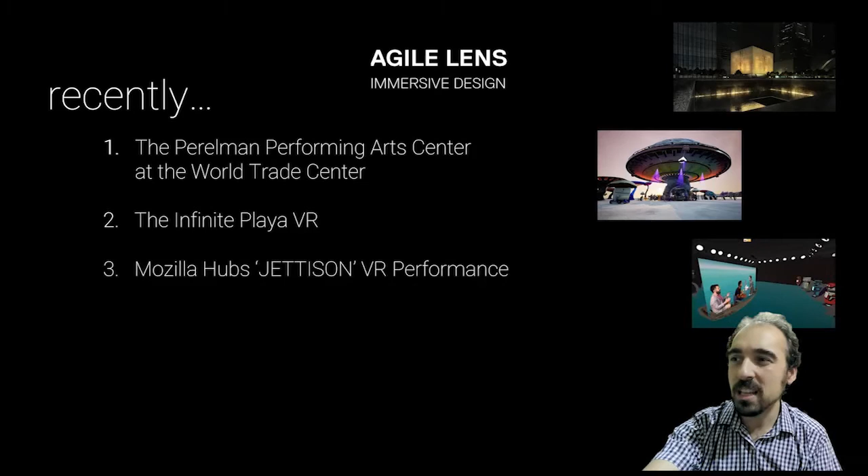We also worked in Mozilla Hubs recently - this was a couple weeks ago. We did a live performance of a little theater piece called Jettison, where we had the actors both composited together inside a browser, and then also had them perform as their avatars at the halfway mark in the show. So a little virtual theater, and it all ran in a browser, 2D or VR - it all worked together, super accessible.

Also a big fan of teaching and education, and giving talks like this one. Since spring semester of 2020 - seems like a billion years ago - I was teaching Unity at the Syracuse School of Architecture. And this semester, I'm at the NYU Tisch School for the Arts teaching drama and game design students how to give good live performance in VR, along with some other Agile Lens collaborators. That's been really excellent.

I also recently became an Unreal Engine authorized instructor, which is very exciting, and I like to bring it up whenever I can because it feels great. I can't really talk about this right now, but I want you to keep an eye on my socials - check out ibrews on Twitter, because there will be more information soon. I'm working on what I believe is the world's first virtual volumetric keynote speech, involving a virtual theater and some very cool volumetric capture technology. So keep an eye out for that.

And then lastly, I bring up David Geffen Hall at Lincoln Center, because even though I've gotten to work on quite a few virtual theaters over the years, this is the one that I hope will become a sequel to the talk I'm about to give about the Brockman Hall for Opera, because we've taken a lot of the lessons from Brockman and brought those and enhanced those and yes-anded those, to use an improv term, for David Geffen Hall.

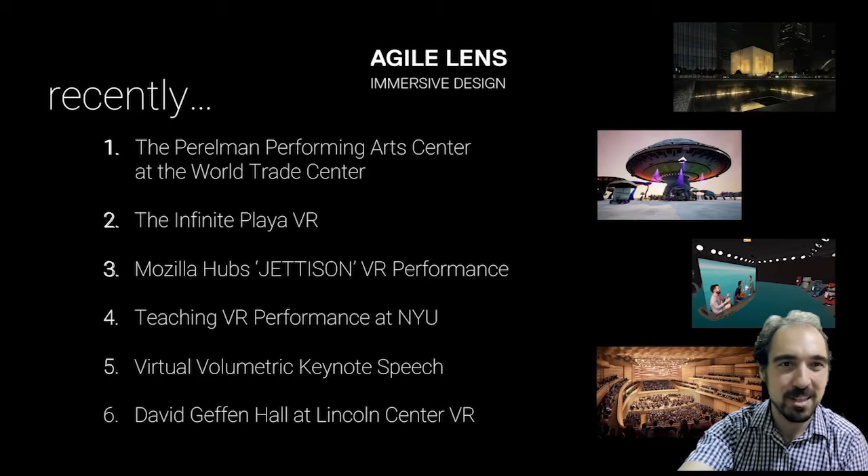And so where did Agile Lens come from, and how did we get to this point where we could actually use virtual reality across the entire design of a theater?

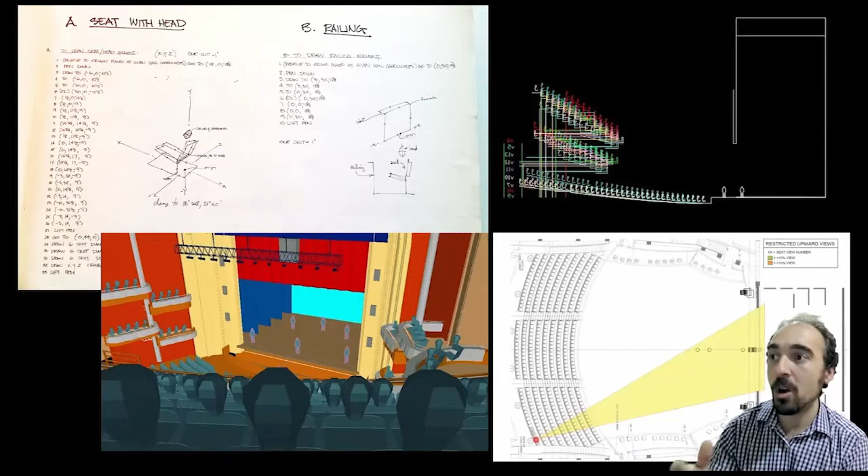Well, Agile Lens grew out of Fisher Dachs Associates, which designs theaters all over the world. They're a theater consultant. I was working there in 2012 and 2013 when the Oculus Rift came out, and that was really an expansion of the work Fisher Dachs had already been doing since the 80s for testing sightlines. So when I got there, we started to do these simple renders to just say, here's 5 different seating options. Which one do you like best?

We found that with these fairly straightforward 2D images, where it's like the same seat shown 4 different ways, we'd get into a discussion with the client where they'd say, I don't know, that head there looks really close. And you'd say, no, it's 2 feet away, that's pretty standard. Or they'd say, oh, the stage looks so far away. And you'd say, it's 45 feet, not that far, trust me, it's like a normal theater. It's just very hard to convey that information in 2D.

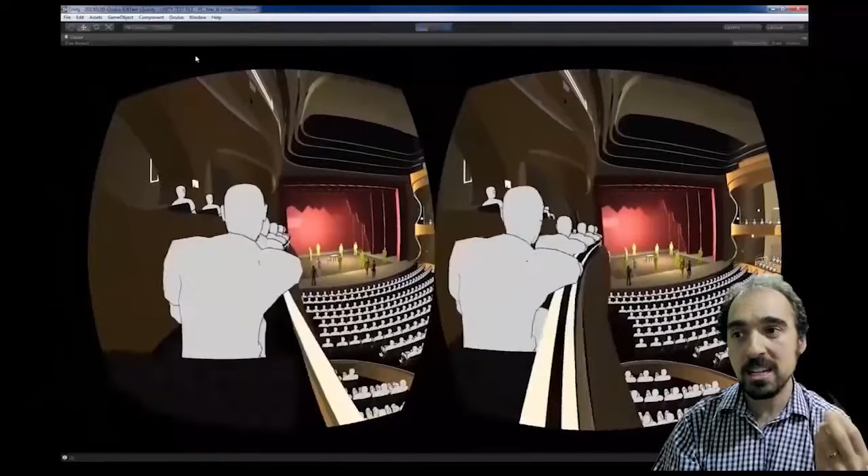So in 2013, we got the Oculus Rift DK1, quickly followed by the DK2, and the ability to do those same kinds of seating options, but now where someone actually has a sense of space and presence, and what it's like to lean just a few inches and how that affects your view. That was an incredibly powerful tool. It was a game changer.

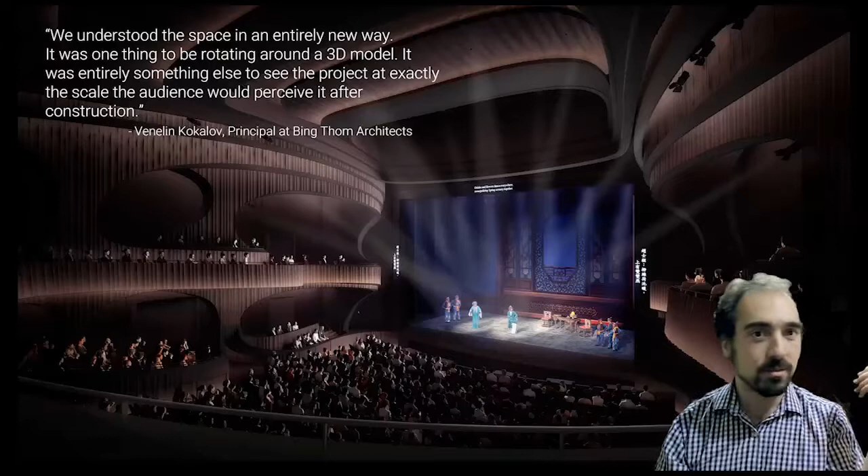Immediately we started to find other uses for this, not just sightlines, but cycling through different design options. The very first project we finished this for was the Xiqu Centre for Chinese Opera in West Kowloon, China. It was great - a very curvy space, a lot of Rhino modeling trying to make its way into Revit, and being able to very quickly compare option A, B, C, D for especially those railings and curves was wonderful.

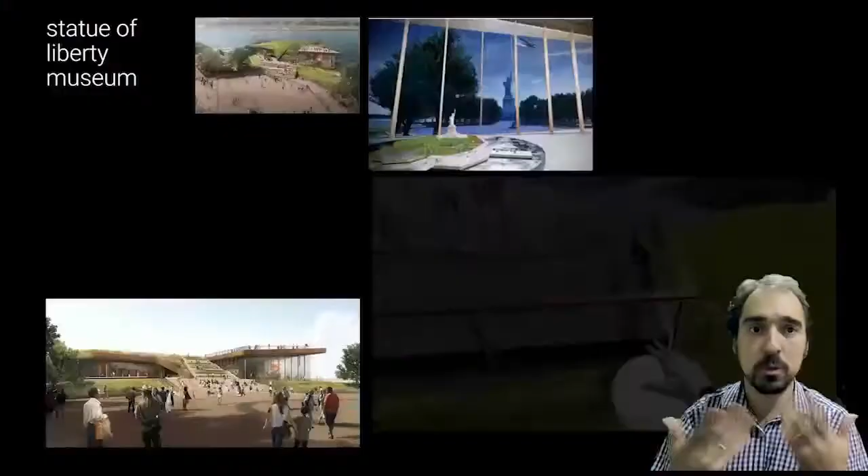And then we decided to form Agile Lens as a separate company to be able to focus on building these kinds of experiences. Over the next few years, we got to work on a wide number of experiences where virtual reality had some tools, for the Statue of Liberty Museum on Liberty Island with FX Collaborative.

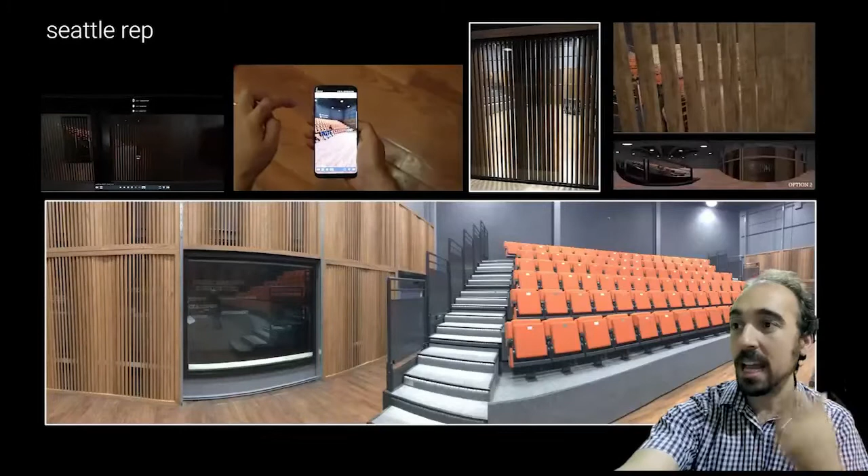That was primarily a design review tool, which I feel is one of the more common uses for VR. Seattle Rep was a great quick little Unreal Engine study where I feel like we really captured the essence of what the final space would feel like, and we were able to look at different options for that wooden screen on the wall, making it very accessible to run on a phone.

Then we had other projects with various lessons - too much photorealism too quickly, being able to grab a section box around a piece of a Revit model and getting really useful information really fast for an internal design team. But what we really wanted was a project where VR could be part of the design process through the entire project lifecycle. That finally came in 2015 with the Rice University Music and Performing Arts Center, known then as RUMPAC, now known as the Brockman Hall for Opera. So we're going to go through some lessons learned over the course of this process.

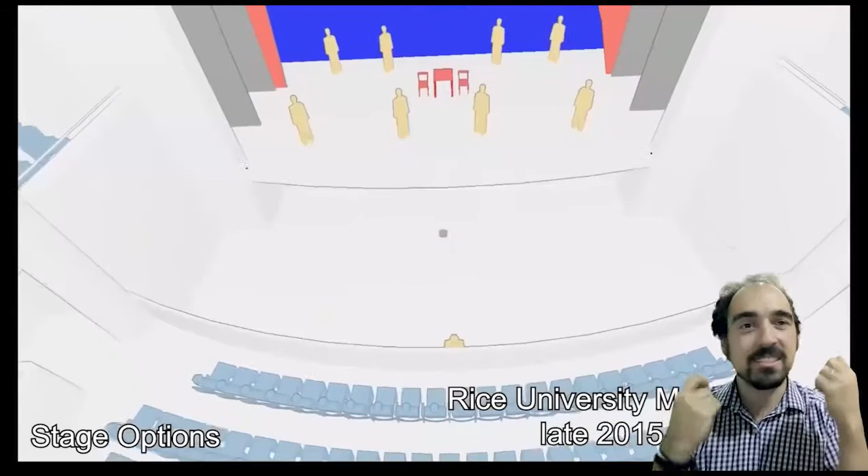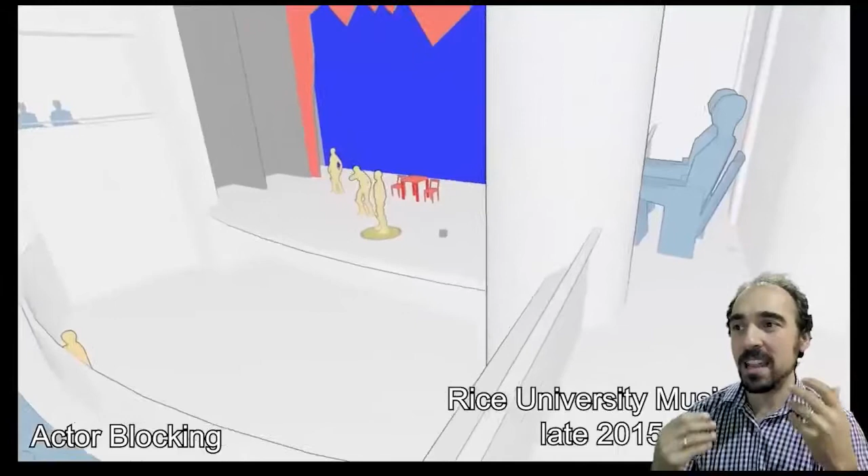Lesson 1, as I briefly alluded to, is that to feel immersed in a project, it doesn't need to be photorealistic. Right from the beginning, when we were just playing in SketchUp for the different designs for this hall, no textures, no lighting, nothing that was going to distract from purely the spatial experience. We were testing sightlines here, putting different things on stage, but really it was just about how it feels to be in this version of the design with this on stage, or the seats in this configuration versus others.

So you'll see there's a blue scheme and a green scheme. It was an incredibly useful study at this stage to just talk about that expansion and contraction of the different versions and test it out from different spots in the hall.

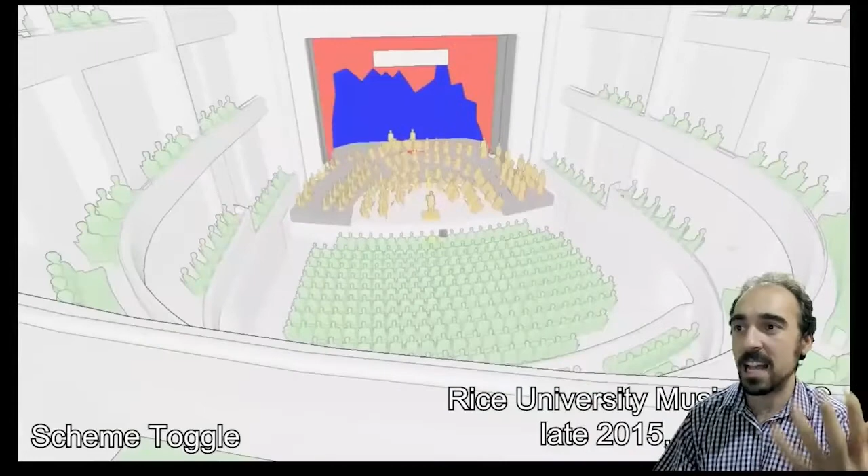And from there, as the project made its way into Revit, we started to develop it further. We got a hold of some Vive trackers. I had some fun early experiments with those, doing things like battling a ceiling fan, but then bringing it into the practical world, we found that it was really useful when we could start to not rely on VR controllers so much and actually deal with real world objects.

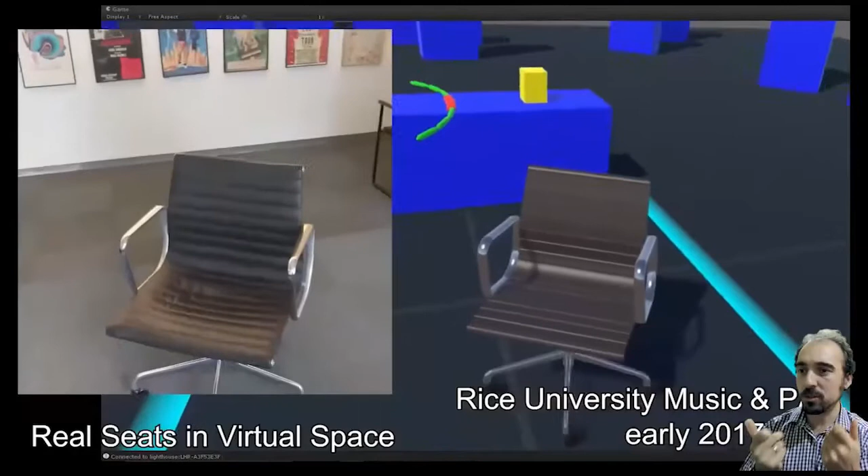So here, we just took an Eames chair that was in our office, got a 3D model of it, and then tracked it in such a way so that while we were in the theater, we could actually adjust the locations of different seats, and then that would actually make its way back into Revit, into the actual design, so we could really fine-tune exactly where different locations would be. We could discover new seating locations. We could check out the distance from a seat to a rail, and again, talk about what that experience felt like.

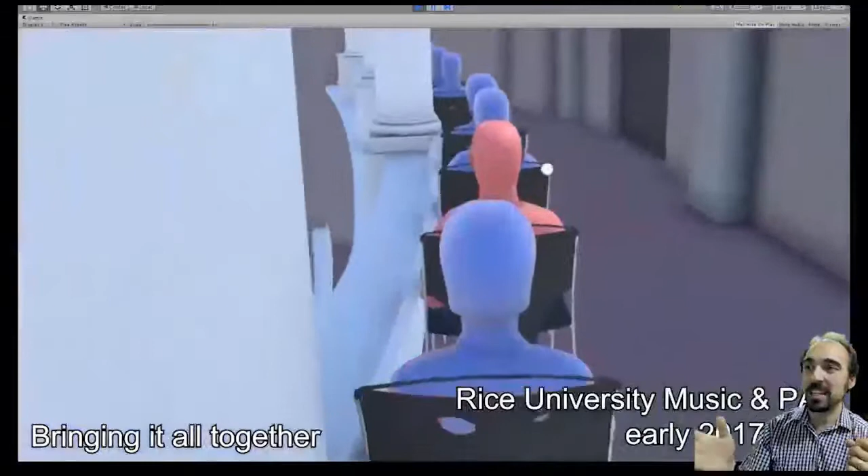And lesson 3 became that it is useful to cycle design options for everything in the project, everything you can imagine. So we found that we were cycling everything from places to put the aisles, to places to put the railings, to the columns, to how the seating could be configured, to where we might want to place lighting locations, to what would be on stage. And we could cycle through all of these options in the same VR experience.

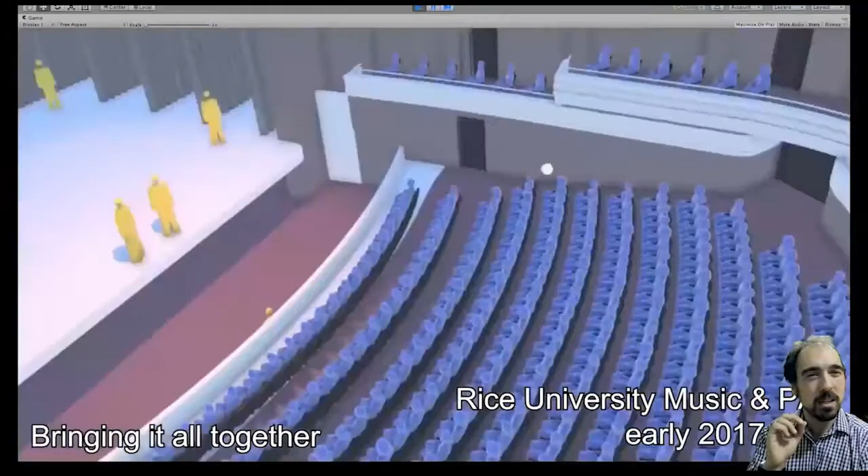And not only that, we could also cycle through the different versions of the project. You see the green there, that's the old SketchUp model, so that if at any point we're wondering, like, man, I feel like we lost some essence of the design, you click a button and now you're back in where the project design was at a more conceptual level. And that became really useful to make sure that there was some spirit that carried through the entire design process.

Lesson 4 became, it is so important to actively make design decisions from within VR, and not so much in a design review capacity where you're just looking at the model and then changing to some different options, but actually like grabbing a ceiling and moving it up and down and saying, down, down, down, stop, that's good, leave it there. That has a lot of power to it.

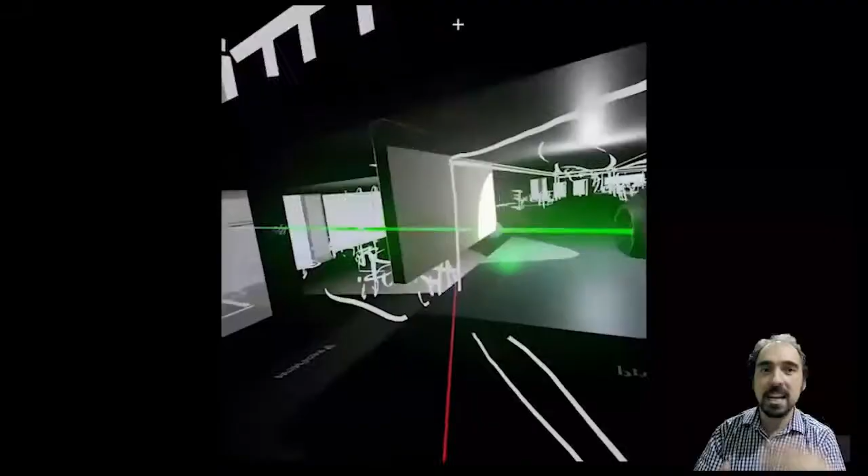But it can also be great for something as simple as a sketch. You know, we've all seen napkin sketches, and this idea that you have this parti, this essence of a project distilled into a sketch. But if you do that in a virtual reality capacity, then you can actually add some scale and dimension and human experience to a sketch. You're not prescribing wall thickness or where light is coming from, but you can have a sense of compression and release, for example, as you move through a project. And that can become kind of almost like trace paper, like an underlay, as you start to lay out other design decisions. And you can start to play with lighting, massing, simple concepts that build upon each other from within VR.

So this is just the standard Unreal Engine VR editor. Nothing too special here, but it's an incredibly powerful workflow as designers.

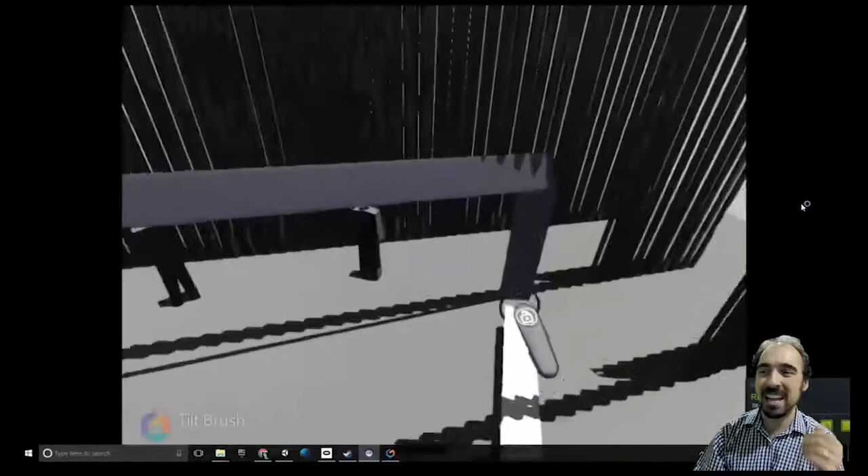We also started to play with set designers. This was actually a little thing we did at a conference where we let set designers actually take the stage for Brockman Hall and play with just sketching on top of it. And then they could drop their designs into the actual theater at its current state and jump around to different seats and see, you know, how does that feel?

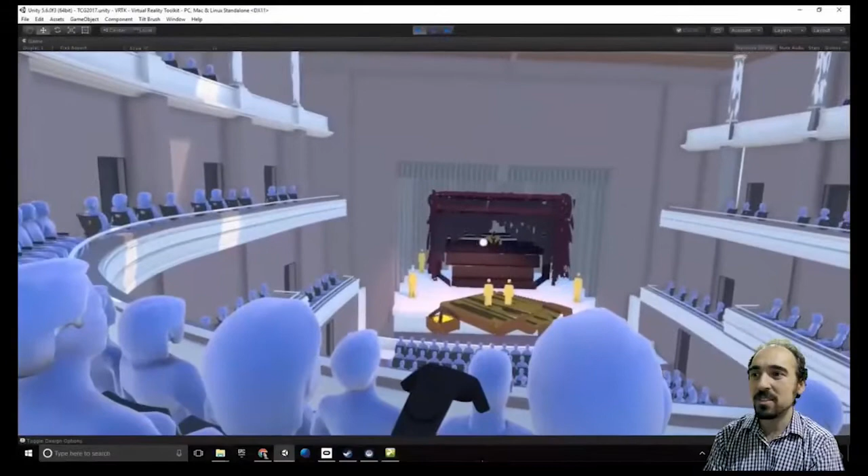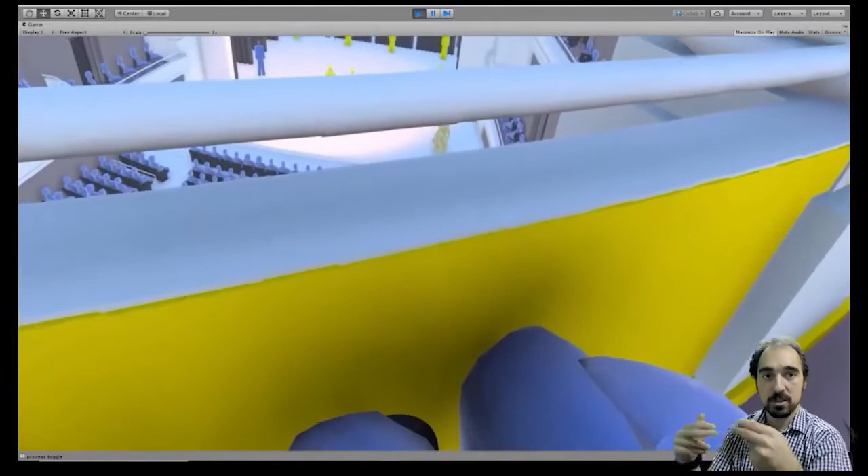And then for the railings, we really went above and beyond by making it so that there was an algorithm that started to dictate how the railing was designed. And we actually allowed the architect, Allan Greenberg Architects, to sit down and just grab parts of the railing, these 3 parts to it. And then within certain code constraints, they could kind of push and pull it and say, you know, what feels most ergonomically correct. And then they could say, okay, that feels good. And then that, again, could make its way back into the actual design. Very powerful.

Lesson 5 is that photorealism does have its place. As the design gets further along, it is incredibly useful to say, like, okay, but really, what's the project going to look like? And so for us, you know, we were in Unity for the first couple phases of this project, and that was great.

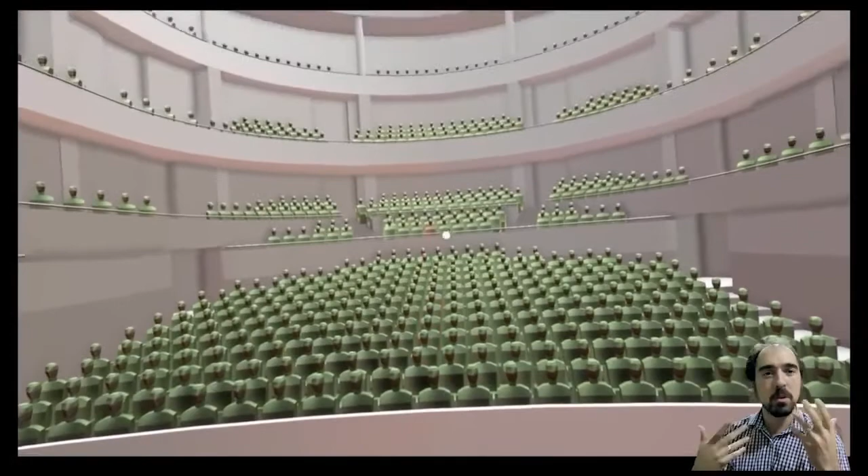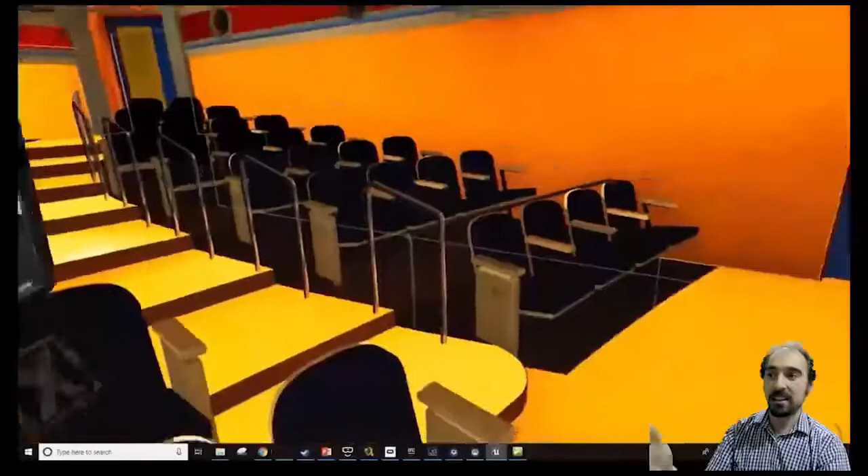When we started to get to a point where we're playing with more color and light, we needed something that felt a little more photorealistic. So at that point, we actually brought the project over into Unreal Engine. Here we are again in the VR editor, nothing special here, and all we're doing is playing with color. When you get that level of photorealism that Unreal kind of has out of the box, you really start

to feel how color and light change the sensation of being in a space. Not to mention it's incredibly easy to scale up or scale down. With a click of a button from the VR editor, you can go back to human scale, but you can also get into this kind of dollhouse mode, similar to Tilt Brush if you've played in there.

It's just an incredibly powerful way to look and evaluate the current state of a design. So here we set a few presets of colors and could have someone put on the headset and just really quickly cycle through them. This isn't something that's scripted and coded - this just became the undo and the redo button.

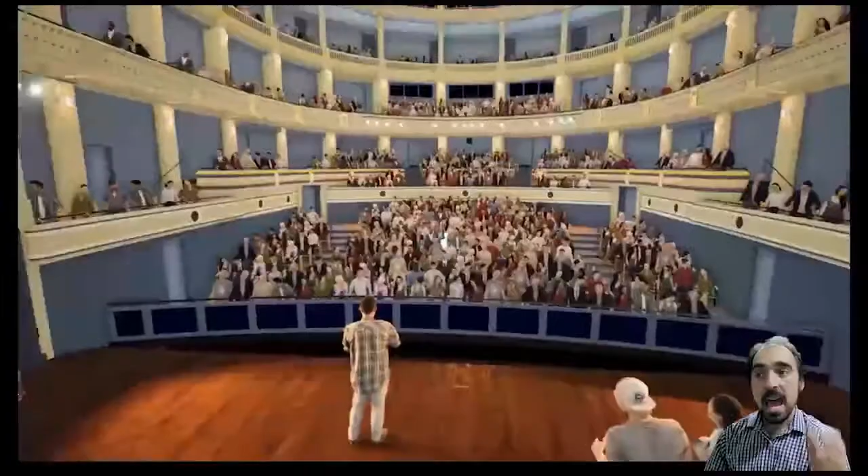And then, of course, we populated it with people and had a lot of the same functionality that we had in the Unity experience, such as the ability to jump to any seat and see what that view is like. Having the room actually full of animated people had an incredible immersion multiplier to really make you feel like you are in what is going to be the final space.

Taking that further, just like we played with sketching set designs via Tilt Brush, we also started to put real designs in there and some volumetric captures of simple performers, just to have a sense of activity and what it's like in the space.

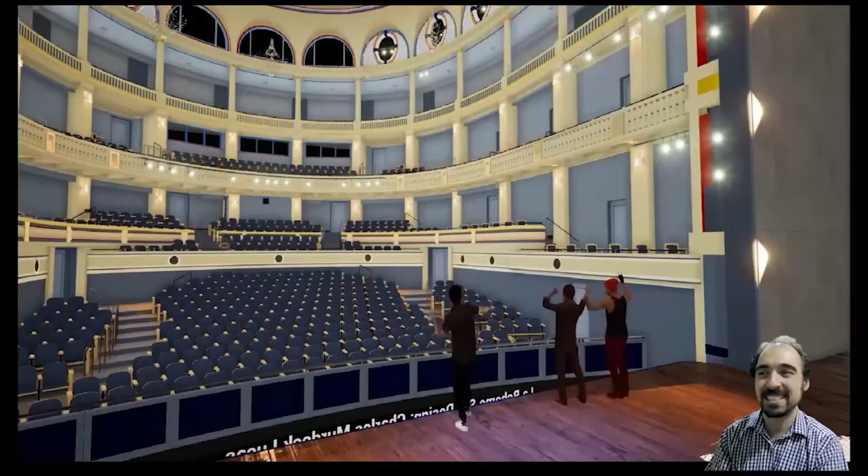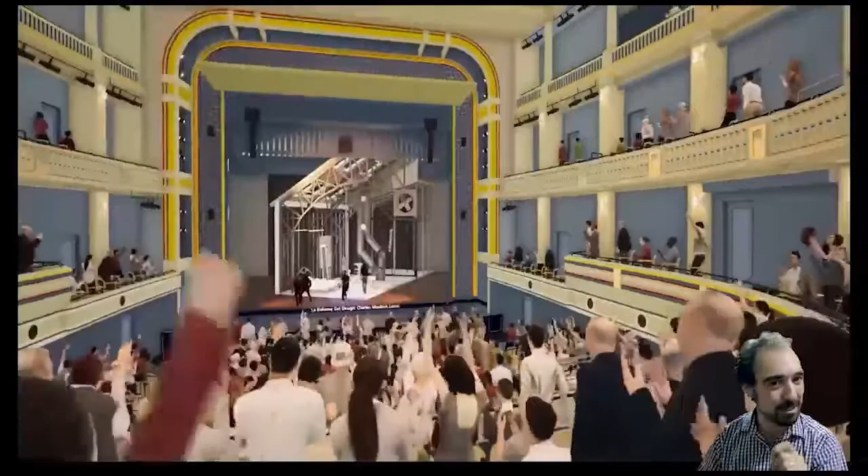We also played with changing the capacity. I'll tell you, it's very sad to be standing on the stage and pretending to perform and only having 25% capacity. On the other hand, it feels very cool to be there on the stage and have a virtual standing ovation. I've had a few guest stars come to the office in New York City, and they always get a kick out of being on the stage, and I press a little button that makes everyone cheer and clap for them.

I'll do that for you too. If anyone wants to come to my office in New York City, you will get a standing ovation.

Lesson 6 is once you have a really robust VR model, especially at that photoreal level, it's a great place to actually generate 2D media. A lot of times we get asked, do you really need to make a VR model? Can you just make us some renders or some animations? And the answer, of course, is yes.

But there's a million reasons why we'd always prefer to actually go as far as VR, because you're actually going to understand what it will be like for humans to occupy the space at some point in a way that no other medium quite conveys. But then also once you're there, you can start to generate images and animations and all those things very quickly, because it is a real-time model running at 90 frames per second.

So a pretty good-looking animation can be output in real time, versus if you were doing all that from scratch, you'd be figuring out what to texture and what to light, and there'd be much more of a process to work through all that, versus in VR, again, pretty much real time.

As an example of this, for the Yale Schwarzman Center, this was actually a fun little study that Unreal Engine did from our office - so thank you, Sean Hendricks, for this. You can look up the case study if you want. For Yale Schwarzman Center, we did this kind of study of moving through the space and actually set up all the camera paths using Unreal Engine Sequencer.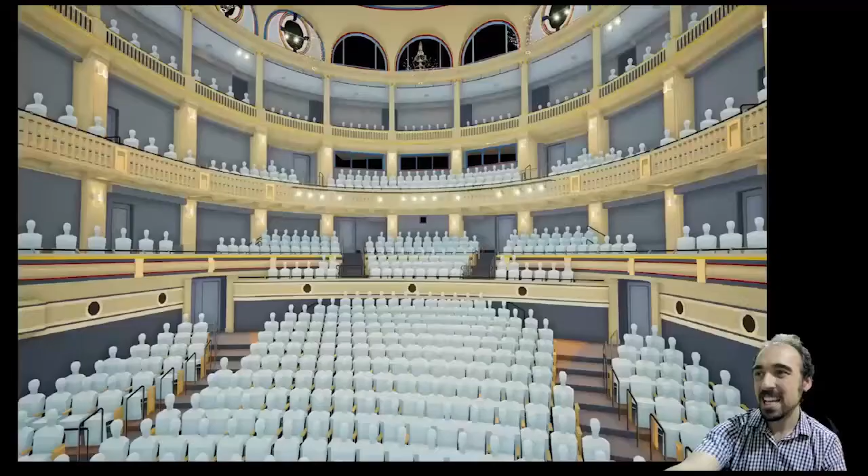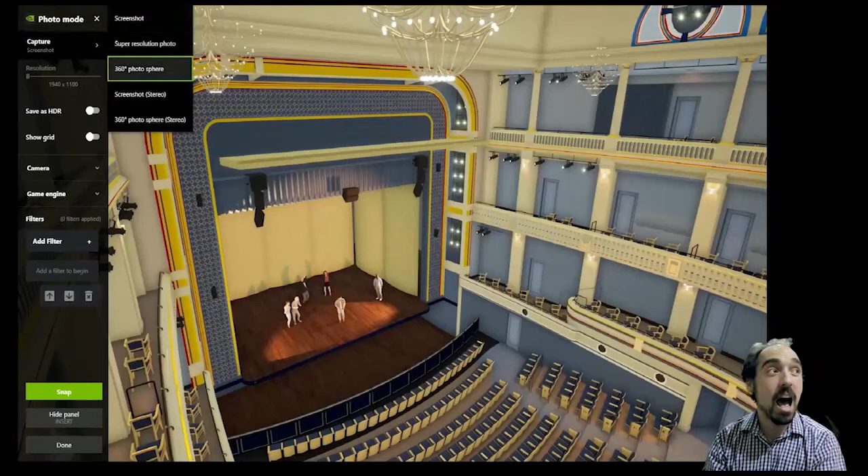So then going back over to Rice, there were tons of different ways we could output things, like literally just a high-res shot that's a command line code in Unreal Engine - that's great. We could get things out of NVIDIA Ansel. We actually even installed the V-Ray plugin and were able to get some great renders out of that. And then, at that point, you can share the 2D content, which has certain benefits over VR.

It's more framed, and it's much easier to share across the world, because then we could start to mock up things like some of those different color palettes we were looking at in VR very quickly. So here was a red scheme and a blue scheme, a lighter blue scheme and an orange scheme, and the top center one was where this ultimately went over the course of about a year. We were able to mock all this up in VR, and then once we'd made a decision, output all of these from Unreal Engine, very useful for showing clients over email or anyone who doesn't want to put on a VR headset.

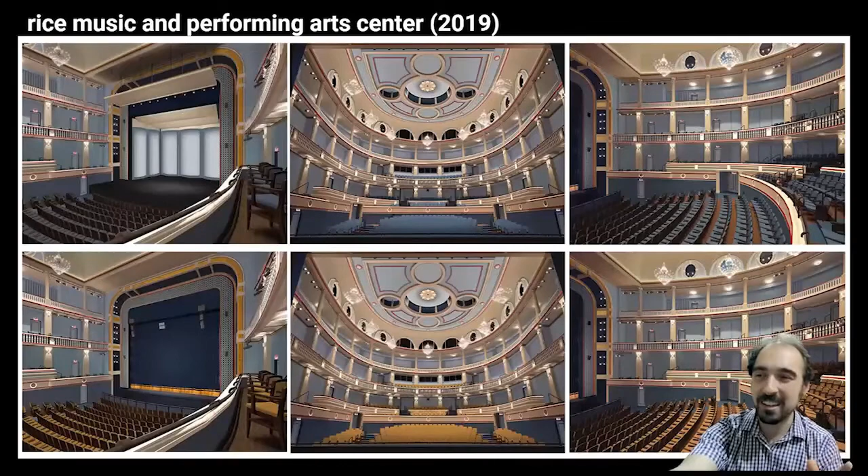You're always going to have people who, for one reason or another, aren't going to put on a headset. So having alternative experiences, like what I was showing with Seattle Rep, on your phone, like a web VR experience, is great.

Lesson 7: VR is going to save everyone involved with the project time, money, headaches, change orders. I don't know how to emphasize this enough. There might be a little bit more cost up front with getting these models robust, but let's just say significant reduction in all those things. I felt it on this project. There were fewer meetings, the meetings went faster, everyone was happier with where the design was going. More people were smiling. All good news.

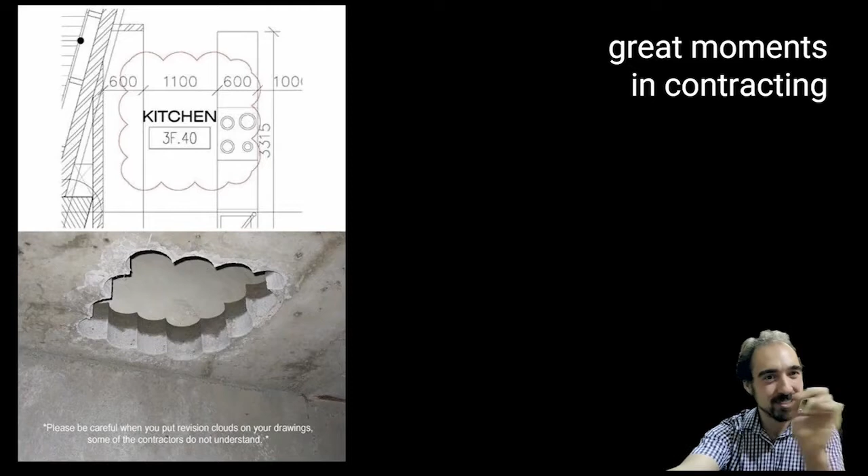I like to show this slide, put together by Fisher Dachs Associates: great moments in contracting, where 2D representations of design and architecture, such as a revision bubble or a call out, sometimes get misinterpreted. So the more time you can get everyone involved with the project to spend inside a VR headset, or even just a real-time version of a model that feels fairly photorealistic, the fewer of these kinds of headaches you're going to run into when the project is actually being built.

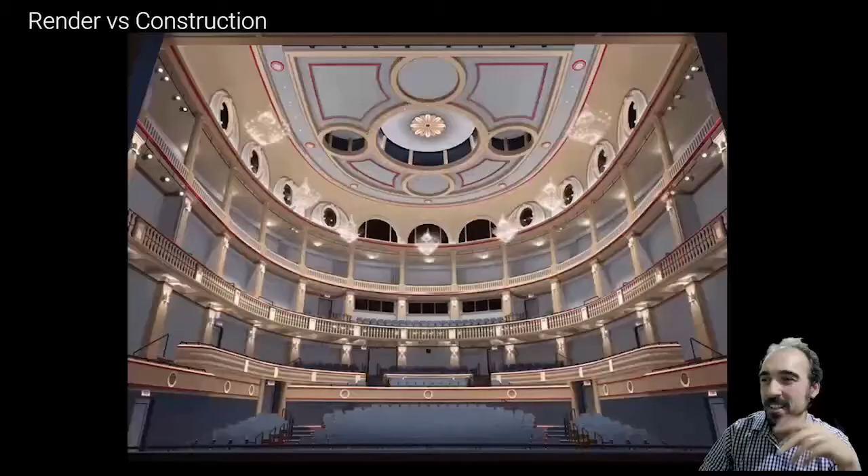Here's a nice little GIF, sliding back and forth between our render coming out of Unreal Engine and V-Ray over to the actual construction site. And here's a render that I think is a little bit overexposed, but we could work on this a little bit more—just kidding, that's the final project. This image, I think, just came out a few days ago, and it's like, oh hey, great. In some ways, I'd say the render looks a little better than the final project, but there's just a really nice level of verisimilitude.

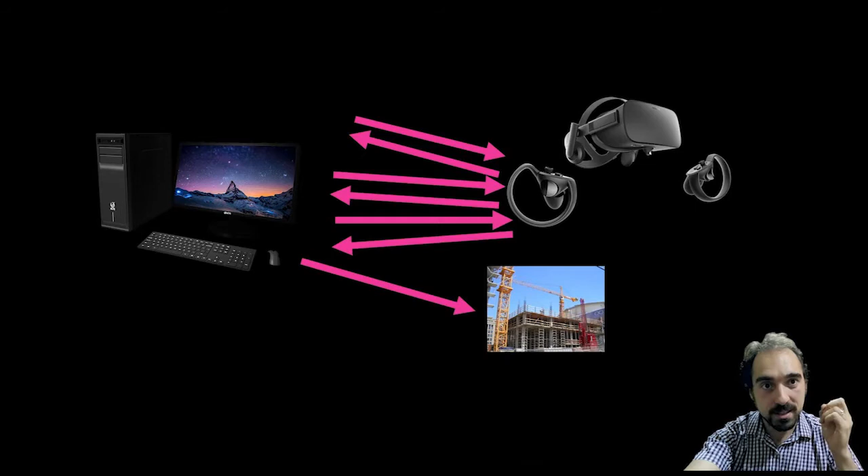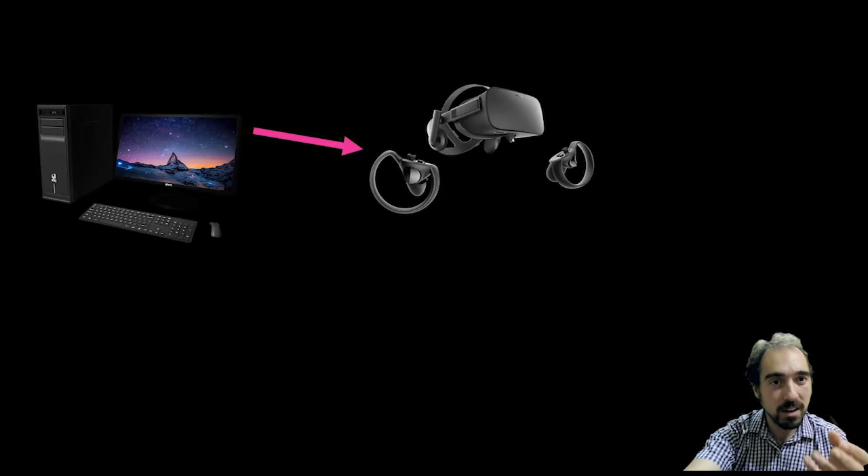Ultimately, the goal here is pretty simple: we are trying to cut down on the design review element of using VR, where you pop your head in the VR headset, go back to a computer, make some changes in VR, computer, back and forth, and then ultimately coming out the other end having a little bit more of this active design—this inside-out experience where you start on your computer, do all the precise things there, go over to VR, and then some sense of what you change or modify in VR makes its way into the final design.

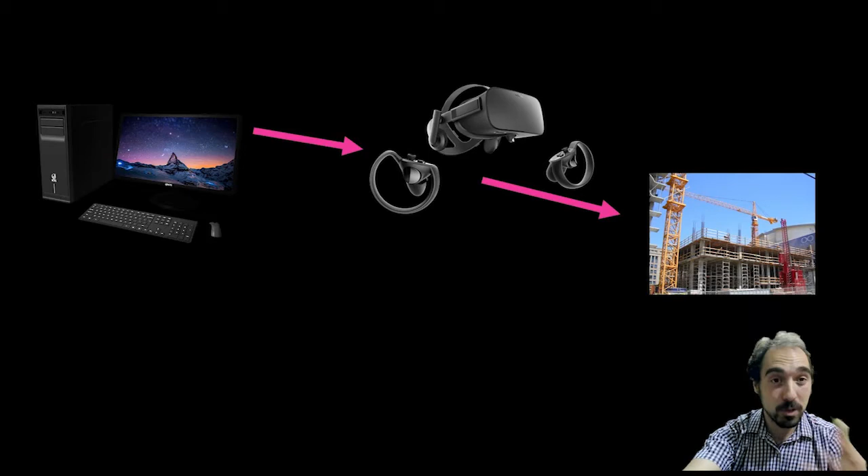I'll also mention that sometimes it can be really excellent to use these models for virtual architecture. That's a talk in itself, but it involves a bit more of a process: starting on a computer, maybe massing some stuff out, maybe starting in VR, and then ultimately just outputting the thing to VR. Maybe this is a design or experience that has very clear functionality. Let's take Infinite Playa, for example, where you're going to have a ton of people going into the actual space, and it's never going to be built in the real world, but it still needs to serve the same functions as real world architecture. So there are some real opportunities coming up, I think, for anyone with a great design aesthetic to work on these kinds of things.

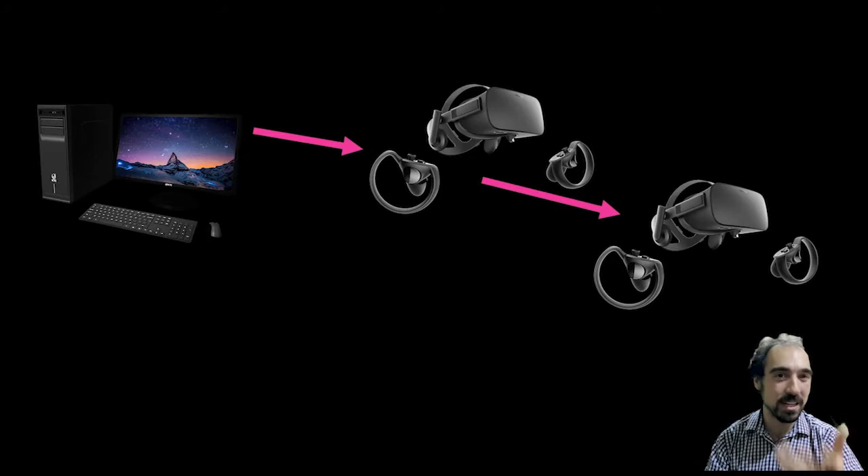On that note, I do want to mention that this project, you can visit it in Houston, Texas, but also we're partnered with Guru right now. And Guru is partnered with NVIDIA and Unreal Engine. So we have the two other speakers tied into this.

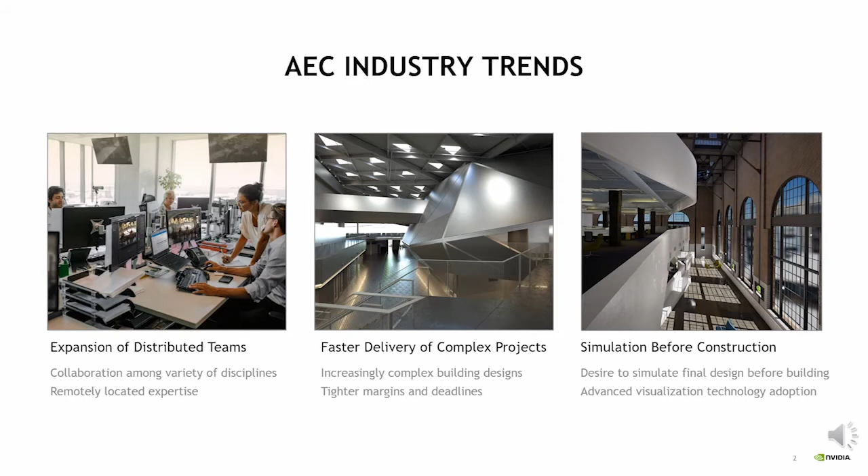As a result of these industry trends, the obstacles faced by AEC firms become a bit more challenging. Efficient collaboration has typically been problematic, but it's getting even more so these days. Those geographically dispersed teams can have difficulty exchanging ideas and information, and that can result in duplication of work or delays with agreeing on decisions.

It's also difficult to effectively communicate design intent when a project team is made up of so many different contributors with varied areas of expertise. And of course, you throw the client into that mix, which naturally is a necessary complication. Often clients and even project members have trouble visualizing how building interiors and exteriors will appear in real life, and many software tools lack high-quality visual outputs.

So extensive discussions are needed before making decisions with confidence. The result is lengthy design review cycles, which ultimately leads to delays, and many of us have had to work through those. A third area of challenge is optimizing IT infrastructure.

Companies need to maintain high productivity with a flexible global workforce. That means onboarding and offboarding project team members quickly and cost effectively. Those employees require quick access to secure datasets from anywhere at any time on any device.

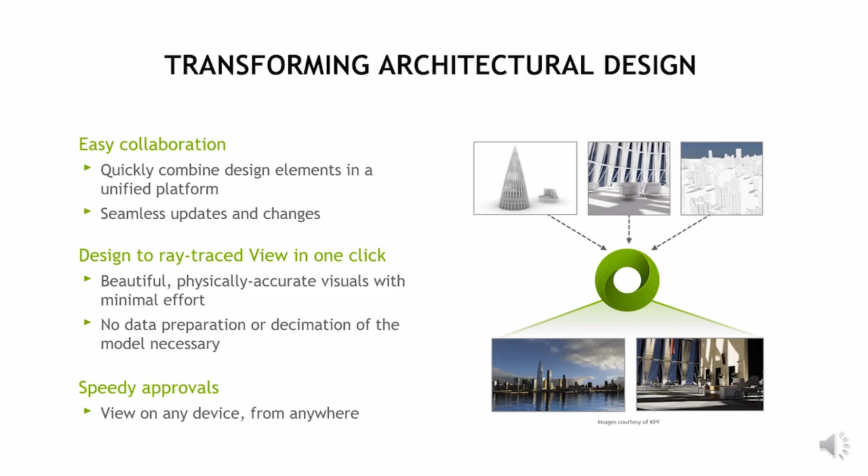You don't have to do any data prep or decimation of the model, which means you avoid wasted time and costly delays in translation and errors between software tools. And teams can speed up the design approval process since decision makers can view that high fidelity model on just about any device from anywhere.

We're fortunate at NVIDIA to work closely with a lot of great people at leading firms all over the world. And we're gratified that several of them took the time to evaluate Omniverse and offer feedback and recommendations, which really helped us refine the platform over the past several months. Woods Bagot, a global architecture and consulting practice, has team members located all over the planet, so remote collaboration is a big deal for them. You can read their impression here.

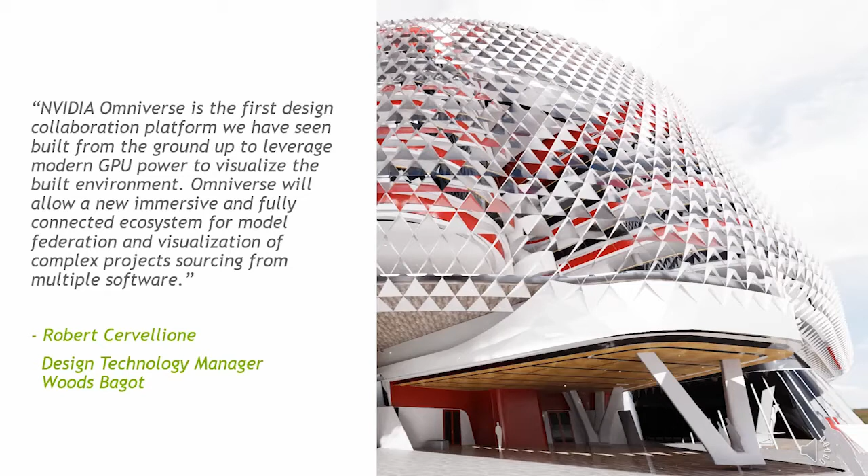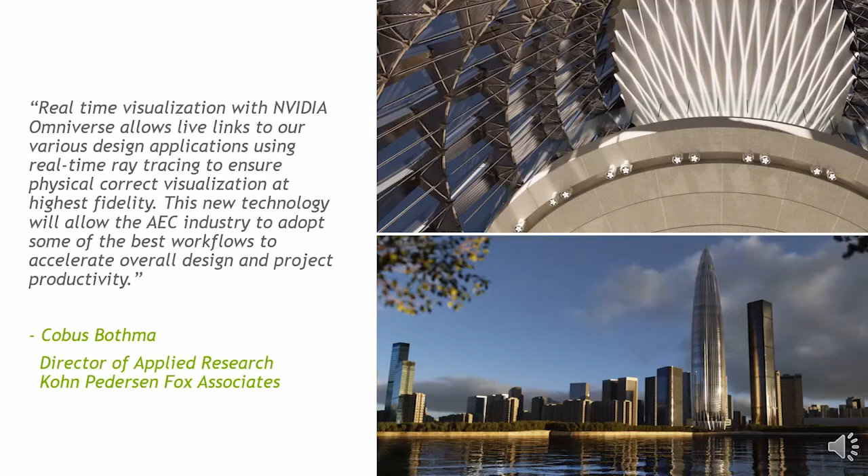We were also very pleased to get input on Omniverse from Kohn Pedersen Fox. Many of you will be familiar with KPF, who are particularly known for their designs of super tall buildings. For KPF, the ability to get physically correct visualization at the highest fidelity with real-time ray tracing is a huge benefit to their design teams.

So we've had plenty of feedback and encouragement from customers helping development of Omniverse, as well as support from our partners in the software space serving the AEC industry. We're at the beginning of developing Omniverse, and the platform will continue to evolve as we add features and functionality in the future. I'm pleased to tell you that we have just announced that the NVIDIA Omniverse Open Beta will be available in the fall.

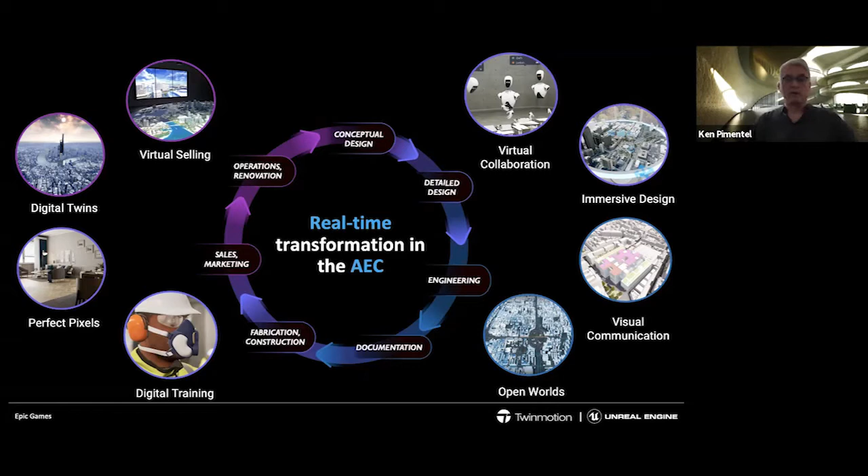And of course, virtual collaboration is a hot thing, and hopefully we'll get a chance to talk more about that. But there's a lot of places that we're seeing Unreal adopted. And if we look at the workflow, it's progressed. We've got a solid lineup of Datasmith support for different tools.

And there's really three components here. The first are the things that we do. So for example, we're adding Navisworks support in 4.26, which is just in previews right now. So people can take their Navisworks data and bring it through Datasmith into Unreal, and into Twinmotion. So we develop a bunch of these. There's a bunch of partners that have built Datasmith export into their products.

So Safe Software has their FME product. That's part of their offering. So you can wire up Datasmith generation into that. Esri City Engine, of course, is the first, actually our very first Datasmith supporter. Bentley Synchro Pro, they've given me the okay to announce support for Datasmith. That's great, that's coming up. ArchiCAD has produced a Datasmith export mechanism. So, and there's many more coming. This is just ones I can talk about publicly.

On the other end, there are partners that are making connections directly into Unreal. So for example, Cesium, that's a GIS tool that brings worlds that are geo-located, geo-specific, geo-referenced worlds into Unreal Engine directly through a streaming process. Esri's ArcGIS Online, the world's foremost GIS tool, has announced they're doing something similar. Their beta starts, I think, next week for that. So it lets you connect in real time all the world of GIS with all the world of Unreal.

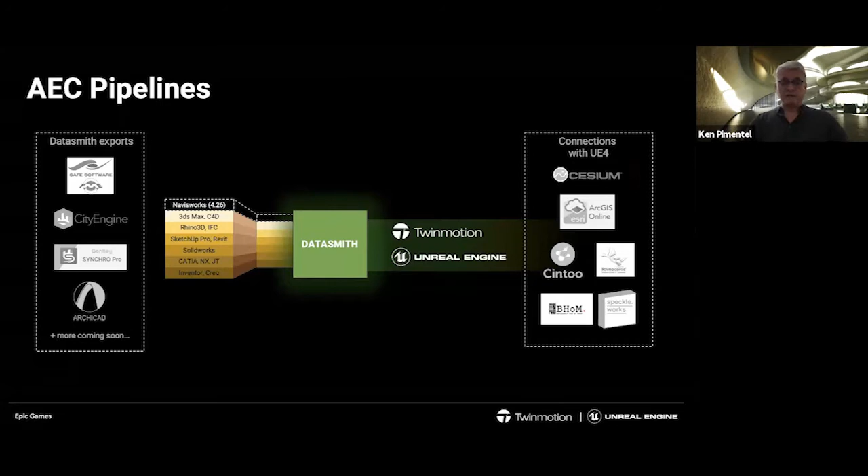It's all free. And Speckle, we're getting behind Speckle in supporting them. There's already a beta of an Unreal Bridge, and there's more work coming there. So, you know, it's just popping up everywhere, this idea of how do I connect my data, my engineering data, my design data, my GIS data, and bring it into Unreal.

One of our initiatives is to combine Datasmith with something in Twinmotion called Direct Link. Direct Link gives you a kind of real-time connection between, let's say, Revit and Twinmotion. You have this live link that you can hit sync, and it'll push the changes from Revit over to Twinmotion in a non-destructive way.

We're combining that with Datasmith, and in 4.26 coming out right now in Unreal, you'll see the first results of that, where Revit has this ability to form a live direct link with Unreal Engine. So you could be working in Revit, say sync, and it'll update in Unreal, only exchanging the new info—not refreshing the whole model. This is fundamentally moving away from a static workflow, which has its purposes, but also gives you a connected workflow, allowing you to connect your tools directly to Twinmotion or Unreal.

So the future, if we look at what's coming, imagine if you could have all these different apps, all of your design tools emitting a stream that then goes into Twinmotion or Unreal. That's what is coming, something we're working on. We see a future where you'll have peer-to-peer streaming, no need for a server. You'll just make these connections and be able to flow your data downstream into Unreal or Twinmotion.

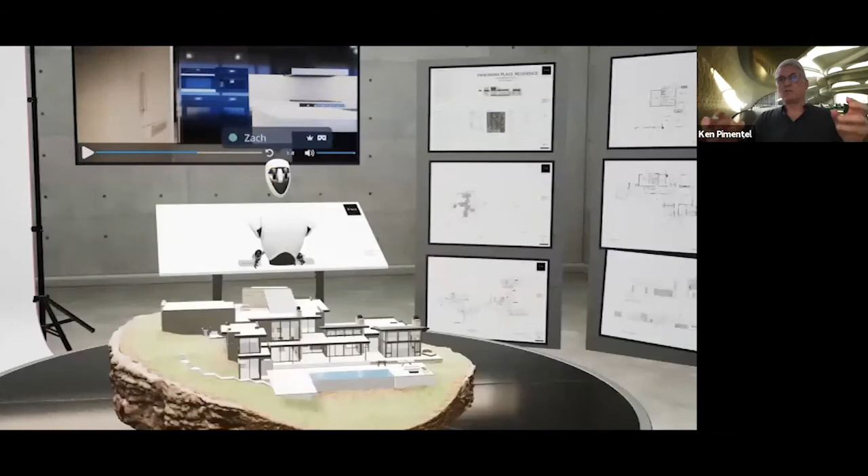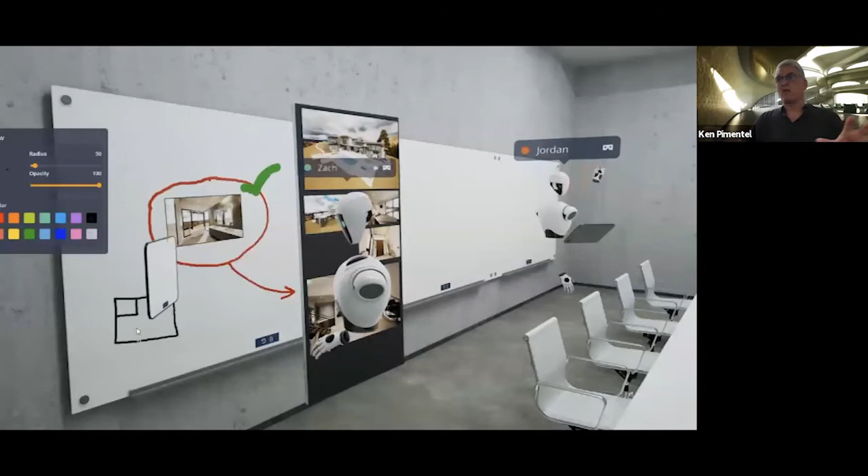Theia is just releasing in beta what they call their Big Room. This allows anyone—it's a template approach—to bring their own data into Big Room. It's all blueprint, so customers can make all the changes; if they don't like how the tool works one way, they can change it to work another way. It's exciting—this is kind of the future of collaboration, especially with the restrictions we have on ourselves.

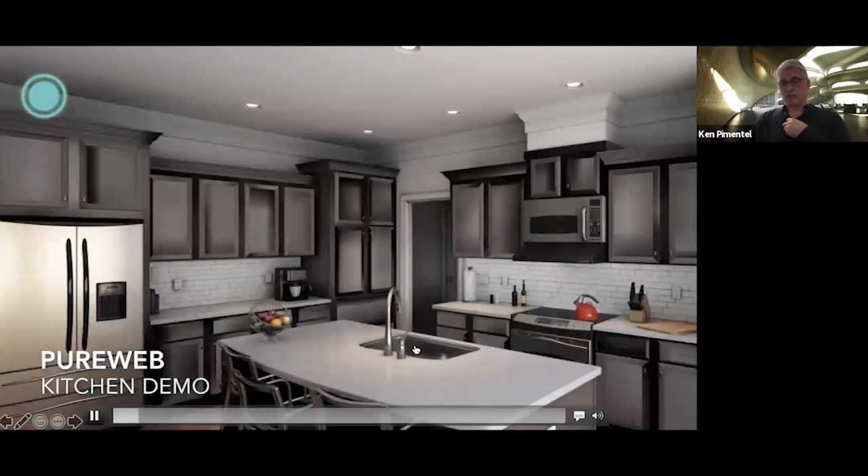There's also the idea of pixel streaming. So how do you get a stakeholder to experience your project when it might require a GPU? Maybe they don't have one, or don't have a powerful enough one. This is a demonstration of an Unreal Engine application up on a cloud—it's using the GPU on the cloud, and it's just doing a video stream.

It'll stream to any device. So you can look at this on a browser, you can interact with it. It's not just for looking, it's for interaction also. So you have all these options that you have with a desktop, but you can deploy it via the cloud.

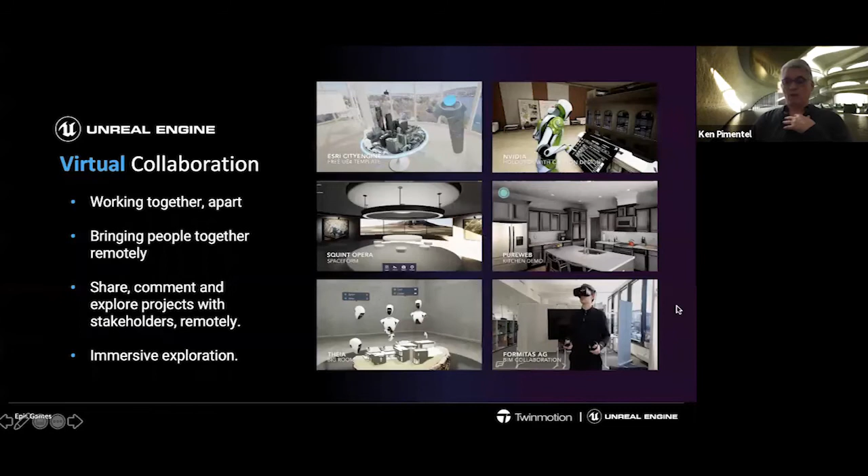Wow, okay, so we're seeing lots of interest in that. That's one of the reasons I brought it up, this is one of the more popular things people are exploring. And we can announce today that there's a new thing we've built, called Twinmotion Presenter Cloud. It's in beta, and the idea is that customers working in Twinmotion will be able to publish to a GPU cloud. They'll get back a URL that they can share with their stakeholders or collaborators, and that's all they need.

That collaborator can be looking at Twinmotion running on their device, whatever it be, mobile, tablet, whatever. It's a video stream using our pixel streaming tech to enable that.

So how fast can it stream? Is this something that could power some VR headsets, or you're not really going to? No, it's more of a desktop experience, interactive desktop experience.

Do you think we'll ever get to the stage where you can get that VR live? NVIDIA's experimenting with that, they have Cloud XR, so they've launched that, it's in beta right now I believe, and I've heard good things about it. Where it could have a future where you have a connected capability, and you just put your headset on, log in, and it's all streamed to you. So that is nearer than you might think.

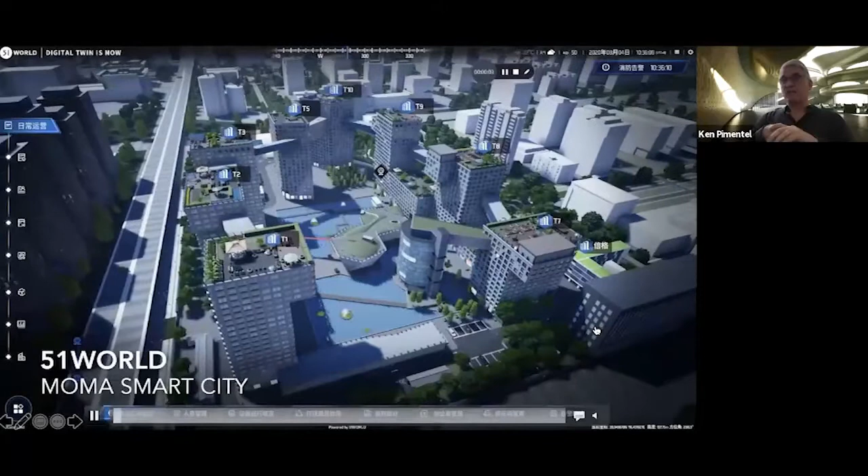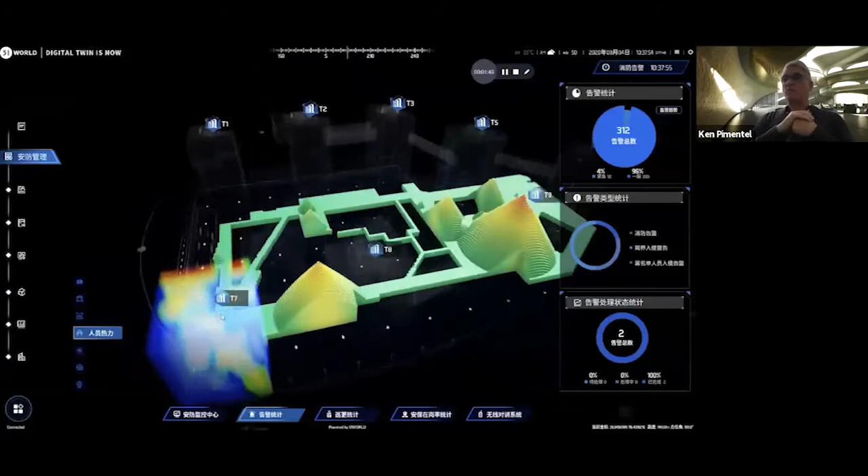One of the ones, the B1M video covers the work being done at 51 World in China. It's amazing the scale of the projects they're tackling, it's everything from city scale to building scale, and they're exploring how you represent data, what kinds of interfaces are important. They've been doing this for the last 5 years, so they're probably one of the more sophisticated deployers of digital twins where a 3D world makes sense.

So here's all of Shanghai in Unreal. The capabilities of Unreal to bring in massive data sets like this is just phenomenal. And here they're using pixel streaming to bring that complex experience onto a tablet, showing how it can all come together.

So I think expect a lot of exciting, more stories. We're working on an effort to get out a little development template for people that want to start playing with this, that helps them navigate building a digital twin for themselves.

And you're not talking about a digital twin of a building, you're talking about city scale as well, which is more impressive, rather than dealing with the small problem. I'd say there's more interest at the city scale than the building scale right now. I think the cities are driving a lot of the interest, or the town councils driving a lot of the interest, because they see it as a simple interface into this complex world of their town.

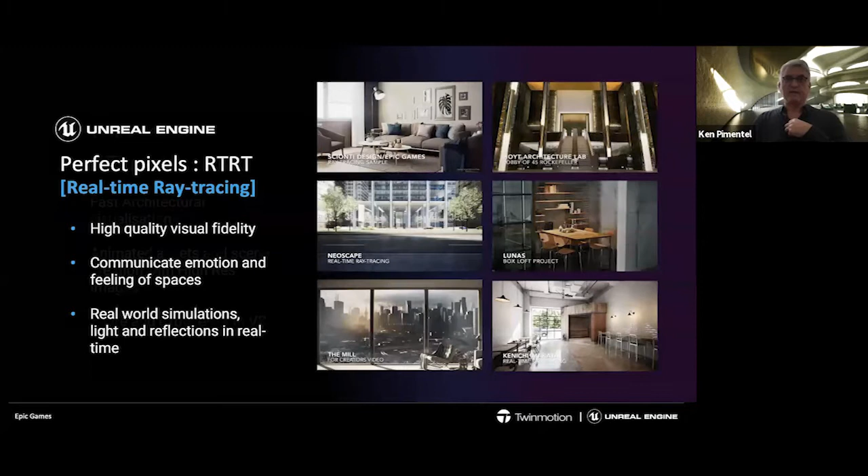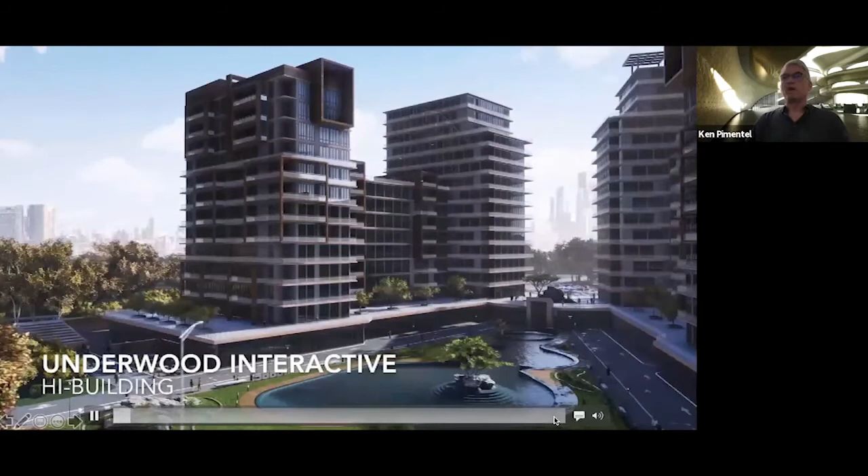That's something that's exciting. I think you were also asking about Twinmotion, let me jump into that. So 500,000 registered users at this point, blew away what we kind of were expecting. And the projects that are being produced - these are all straight out of Twinmotion, there's no games being played in other post-processing tools. But the point is that we can handle scale, it isn't limited to small projects - big projects can be taken on. There's a video of this whole city in Twinmotion in Australia, which we're working on to promote. So Twinmotion's boundaries are expanding, but its ease of use needs to be maintained.

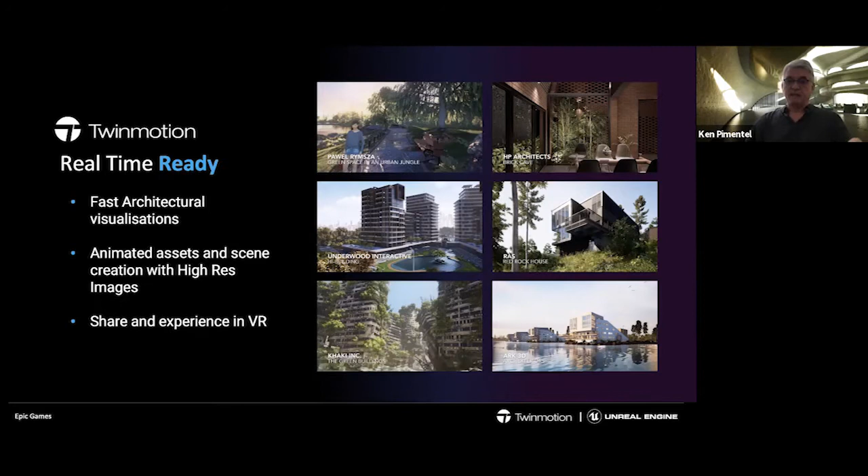And where's it going? Well, in Unreal Engine 4.26, for the first time, you'll be able to start a project in Twinmotion and finish it in Unreal. This really opens up the black box. So many tools that firms use to produce visuals are kind of black box - they can put data in, but they can't really get data out of it. Here, for the first time, we really are breaking that open by letting people fully leverage that ease of use, but then take it wherever their imagination takes them in Unreal.

Cool. So we've talked a little bit about desktop rendering, cloud rendering. I mentioned virtual reality on the way, but we haven't really talked about augmented reality. Is there anything that you're working on in that space for mixed reality?

Yeah, so there's a range of ways that you might want to engage a stakeholder. I think we call it XR, that's kind of the term these days. Just a snapshot - you want to show someone how to visualize turning their construction site into the finished building, and AR can give you that window into the future. What we just added was support for Azure spatial anchors in 4.26, so you can register your experience to the physical world, and then when you go out on site, it just snaps to that alignment, and now you're seeing the virtual world laid correctly on top of the physical world. So definitely big support for that.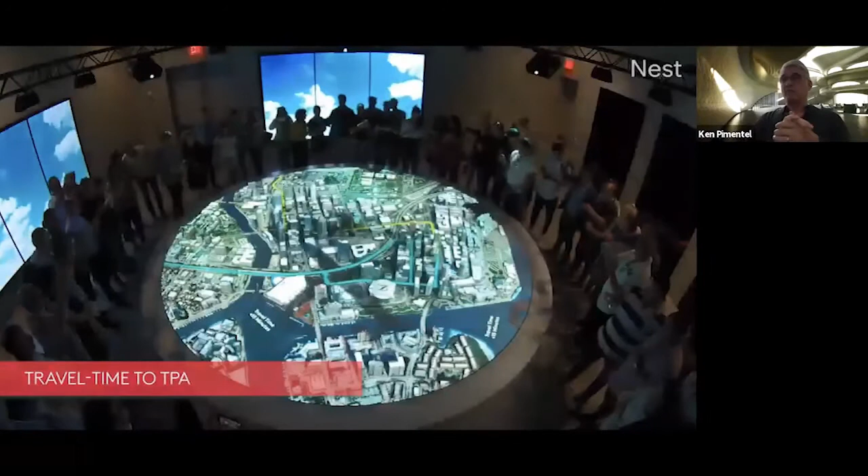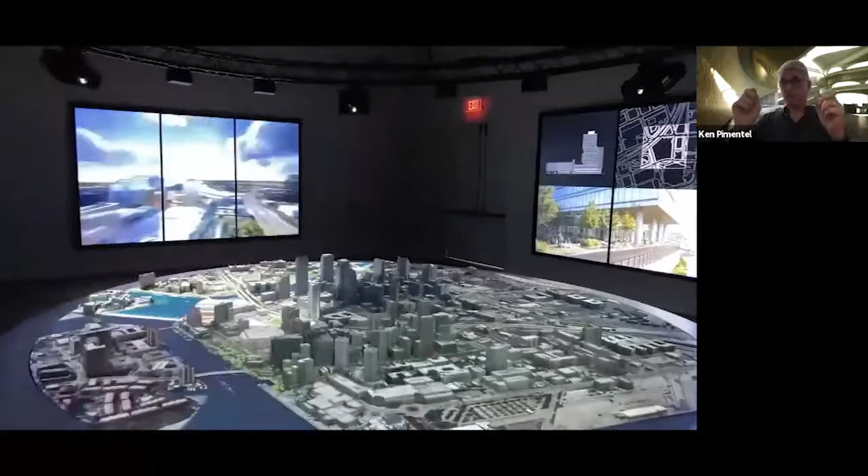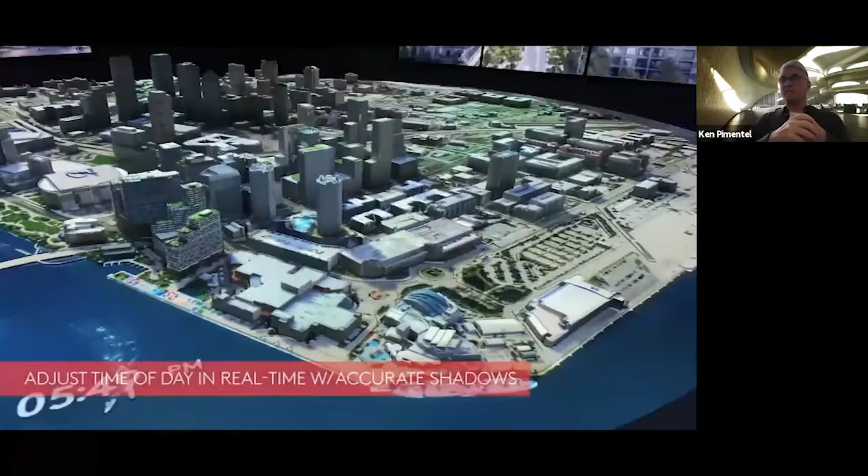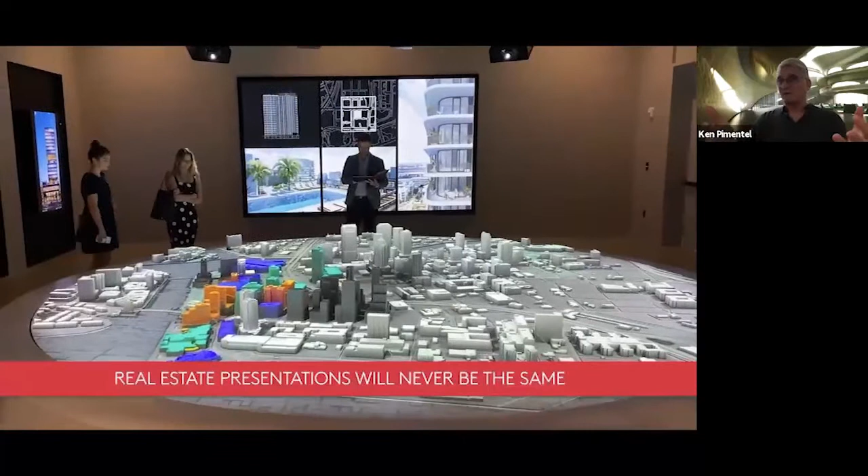There's other things on network shared spaces. There's a lot of work we're doing around XR. People are exploring what's possible in XR. Here's a mixed reality example where you combine 3D printed buildings, white buildings, with laser projection, and have it all in real time, driven by Unreal Engine. So in real time, you can bring in data and have it update and show on this mixed reality environment. For collaboration with people that are not sophisticated with technology, this is kind of the ultimate expression of it - it's right in front of you and it can transform into telling a different story depending upon the conversation. So we love it when we see people doing innovative things like that.

So last October in London, you showed some preliminary technology, and one of the things you mentioned was point clouds. Point clouds are actually an important part of digital twins, the as-built versus the design to be built. How's point cloud development come along in Unreal?